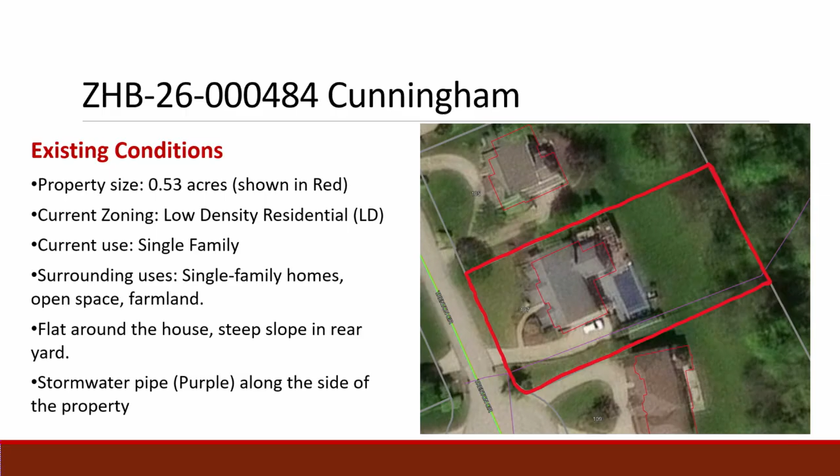The lot itself is relatively flat just around the house, but as you get to the boundary of the pool and the existing patio and deck spaces, it slopes off quite significantly toward the rear yard. I'll get to a picture here later.

The proposed improvement requiring the variance is a proposed pool house. As seen from the rear of the yard, it would be 2 stories; as seen from the house, it would be only 1 story in height. The pool house has a total square footprint of 676 square feet.

This variance is for additional lot coverage only. The maximum lot coverage in this zoning district is 15%. They're asking for an additional 1.3% lot coverage to enable them to construct this pool house.

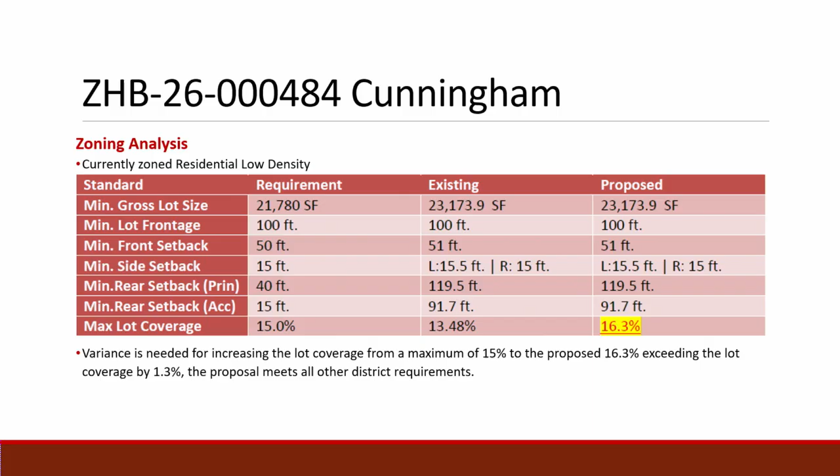The main hardship here is the slope of the lot and the topography. The backyard itself is very steep.

The applicant is hoping that with this additional structure on their lot, it gives them some more usable space in their rear yard, connecting to the other features in their yard.

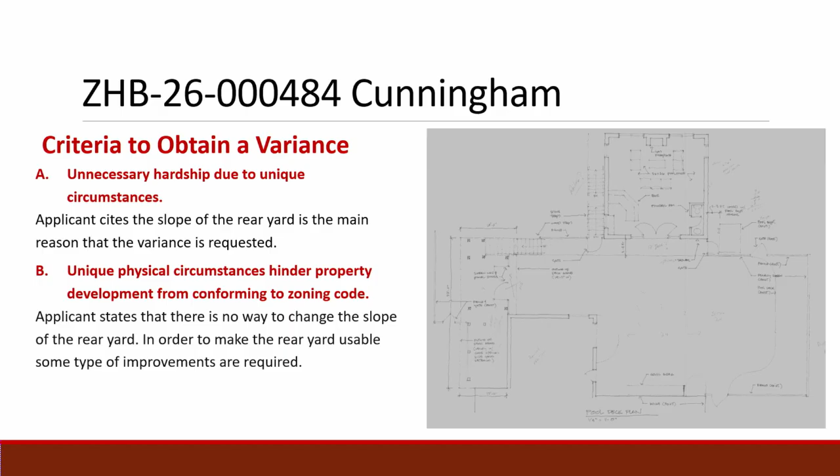The pool house itself is relatively common for Peters Township. We have a lot of accessory structures, including pool houses, when people install pools in their rear yard.

They do not propose any additional grading that will require the construction of retaining walls or grading within the setbacks next to adjacent lots.

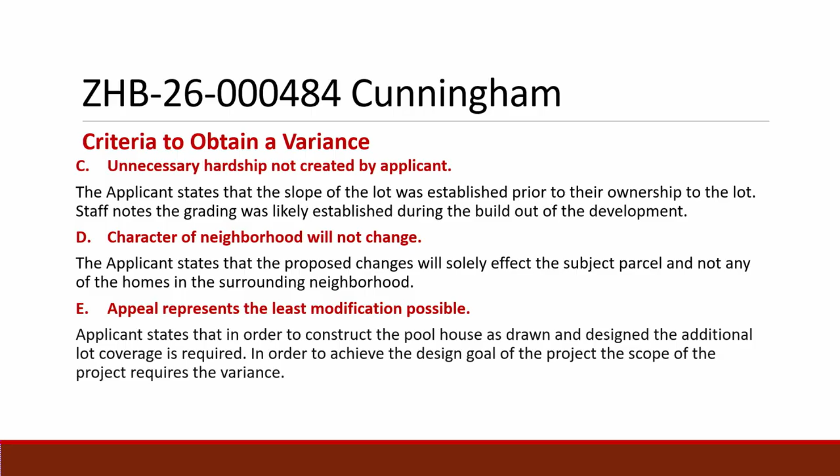Our conditions, if you were to grant this variance, are fairly standard. They have to apply for a building permit and they'll have 1 year to start. They would also have to come in for an additional variance if they ever want additional lot coverage in the future. That's all I have for you.

Mr. King, the pool house is an accessory structure. That is correct. So is the accessory structure counted in the maximum lot coverage? Yes, all lot coverage in this zoning district, whether it's a principal structure or accessory structure, is all bundled under that 15% maximum limit.

Okay. Thank you. Thank you, Mr. Chairman.

I guess, what is the square footage of the pool house that they're requesting? The footprint in total is 676 square feet. The additional 1.3% is roughly 300 square feet.

Did they work with you at all to try to reduce the size? So I met with their contractor. They also dropped off some drawings, and we talked about this a little bit to get to these numbers. I believe originally they were proposing something bigger while we were communicating over the phone, but the drawings included in your packet and on the screen are the ones submitted for this variance.

Any other questions for Mr. King?

I'm going to lay out some math for you, and you tell me if you think this seems accurate. They're proposing a 676 square foot pool house. As it currently stands, they're at 13.48% lot coverage, which is 1.52% short of the max.

And ordinarily, the planning department would treat something as de minimis if it was 0.5% or less. So if we take the amount that they're short of 15%, that's 1.52%, plus a de minimis amount of another 0.5%, we wouldn't be here if they were at that or below.

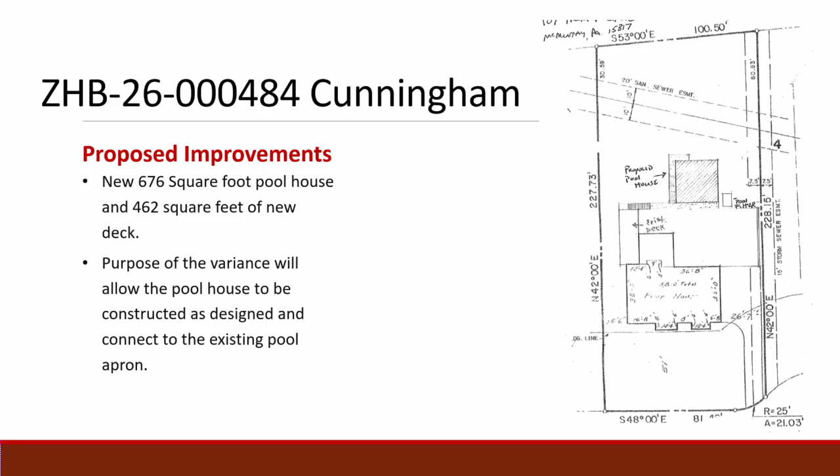Did you follow that conversation about the size of the pool building? Mm-hmm. Could you talk to us about the size you're proposing, and if you reduce the size, you wouldn't need a variance? I talked to that with my contractor, and he said he thought the size to include everything we wanted in there would need to be that size, is how he brought it up to me.

And he said the only way I could do it is to file the variance, because due to the previous owner, he put an addition on the back of the house, which takes up the already existing coverage, and he also already put the pool in, so the pool also counts toward that. So when he went through all the calculations with the architect who did that, he said this would be the most substantial to get everything you want in there, so that's how he said it.

So he came up with the size of the building? Yes. Well, we both did. Okay, yeah, we both did. And he showed me the lesser version, to show how we would just have to cut some things out of it, and what we were doing based on the amount of money that went into it.

So normally in these cases, there's a hardship reason why. Currently, when we bought the house, the whole backyard is a graded slope. There's a very small corner of the yard that's flattened, but nothing really in the backyard is totally usable space. So with this pool house going in, we thought maybe some dirt could grade it, lessen it at the bottom, flatten it somehow, or just give us some sort of usable yard space compared to what we have right now. That back corner is a little softer now.

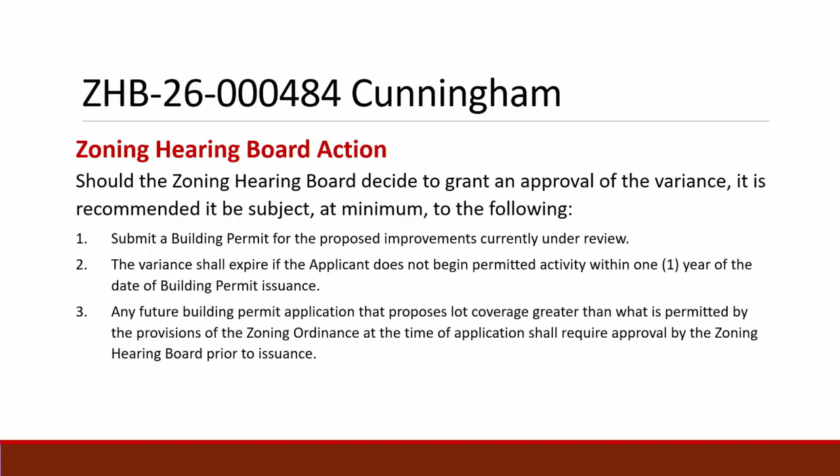Can I have a second? I'll second it. Can I have a roll call vote? Mr. Stevens? No. Ms. Pachalski? No. Mr. Higgins? No. Mr. Jones? Yes. Mr. Griffith? I vote no, but it already would have been denied anyway.

So that motion is denied. The motion to approve, you are correct, has not passed. If it's the intent of those who voted in the negative to deny this variance, somebody should make a motion, a second, and vote to deny it.

I'll make that motion. I'll second it. Can we have a roll call? Mr. Stevens? Yes. Ms. Pachalski? Yes. Mr. Higgins? Yes. Mr. Jones? No. Mr. Griffith? I vote to deny, so that would mean the motion to deny is approved.

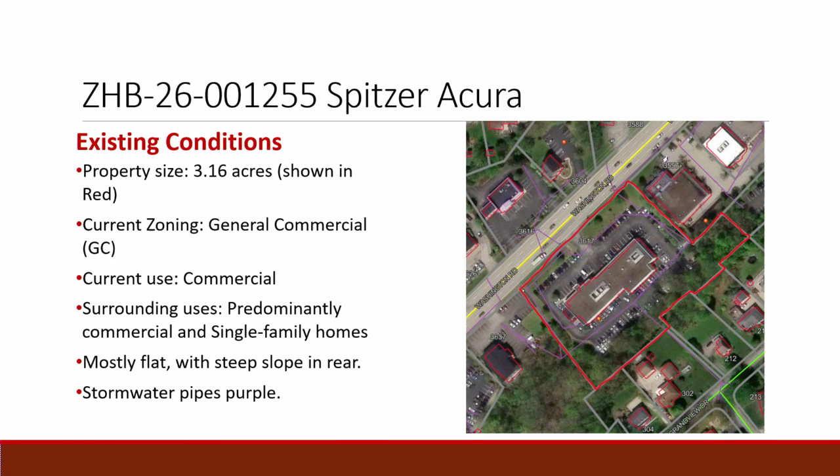Mr. King, would you provide us background and analysis on the case? Yes, so this is a commercial property, currently the Acura dealership along Washington Road. It is roughly 3.16 acres in size. It's zoned general commercial, which is our primary commercial zoning district. The surrounding uses along Washington Road are all commercial uses. To the rear of the lot, it abuts a residential neighborhood, so there are adjacent single-family homes for this property. The lot itself is mostly flat. Towards the very rear of the yard, there is a relatively steep slope before you reach the residential lots behind it.

The request is to reduce the required rear yard, the required 25-foot buffer. This buffer is required between any commercial development and adjacent residential properties. With the proposal they have, the amount they wish to encroach into that buffer varies based on their drawings and their application to us.

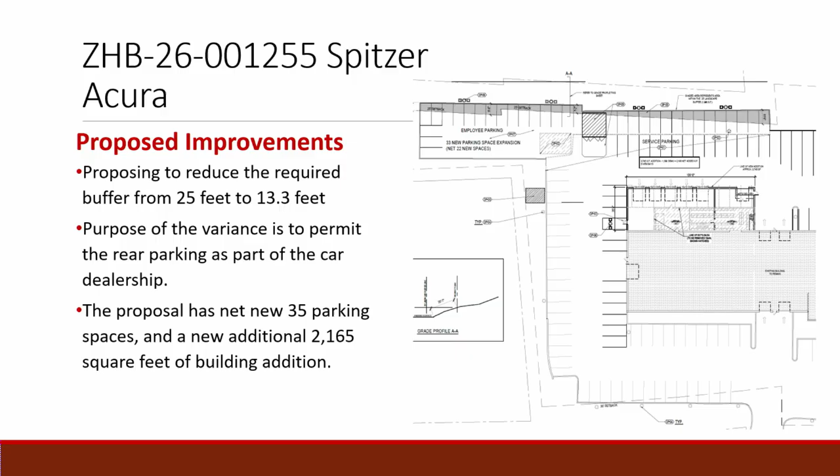The smallest that buffer would become is 13.3 feet. They're requesting this reduction so they can expand their parking area. Along with this, they're proposing an addition to reconfigure and expand the building, but that does not change the buffer.

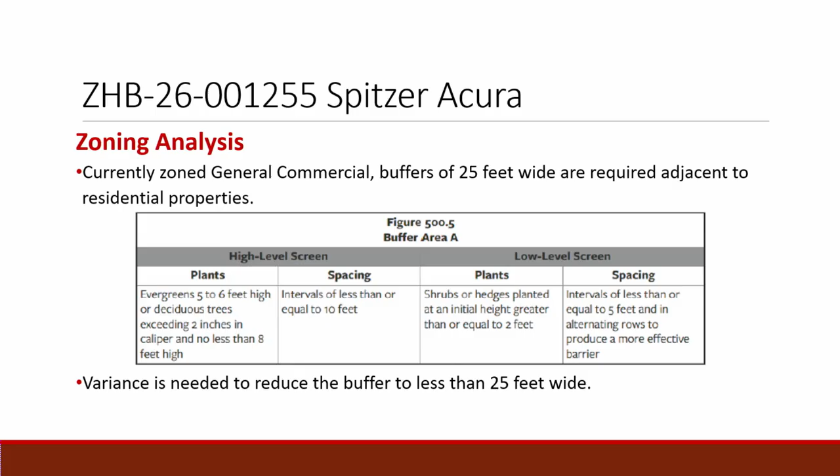We're really just looking at the proposed parking and how that encroaches on the buffer area. This buffer is required to be 25 feet between commercial development and adjacent residential property, and that's the only variance they are seeking. The applicant is proposing landscaping still in that buffer area, even though it will be smaller, and there is a slope that they plan on retaining along with existing vegetation. The applicant is mostly citing that this encroachment is very minimal and is required to expand their parking area for their growing business.

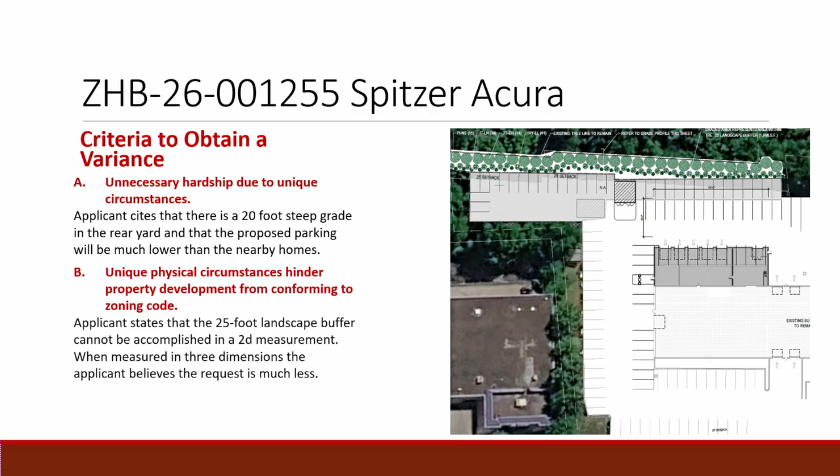I have received, as staff, quite a few neighbor communications from the adjacent residential properties. This plan originally came in as a land development, and neighbors were notified when it went to Planning Commission. At Planning Commission, it was tabled so the applicant could come to this board for this variance. We had neighbors show up there, and some of those same neighbors submitted comments.

I also believe there are a number of neighbors in the room tonight who wish to speak on this. Most of the neighbor communications cite the reduction of the buffer and their proximity to the commercial district as their main concern. If the board were to grant this variance, fairly standard conditions would apply, though they would have to submit any updated drawings to go back in front of Planning Commission whenever it's rescheduled. That's all I have for you tonight on this one.

I have questions. So buffers have been the buzzword in the township for the last couple of months. Is this a landscaping buffer or a parking buffer? What type of buffer is it? This is a landscape buffer. Anytime there's commercial development adjacent to a residentially zoned property, there's required to be this buffer area, which is 25 feet in width and has the plantings shown in the detail provided.

Okay, right in the middle, is that a dumpster area or is that a building? I believe that is a dumpster area. See, Mr. King, you brought up a good point. Prior to the site plan, does this property conform to the parking ordinance? The current parking for that site meets our minimum parking requirements. Perfect.

But again, that's parking for vehicles that are intended or hoped to be sold, not customer parking. My understanding is our minimum parking requirements are based off of estimated trips to and from that property, so ideally customer parking. For example, a high turnover fast food restaurant may require a lot of parking compared to a sit-down restaurant, or vice versa.

Well, maybe I'm misspeaking, but isn't this site plan for vehicle sales? My understanding is most of the proposed new parking is for storage of vehicles that would be sold as part of the dealership's business. And around the area where the showroom is located, that's where you're required to have customer parking, handicap parking, things of that nature. Correct.

So, and I know the applicant would address this if the administration has some questions. But the area that's shaded and the area requesting for the variance, that's to provide vehicles to be situated there in the event of a sale or to show customers. That is my understanding, but the applicant could speak better to that.

In fact, the landscape buffer - all of those trees - I think they all lose their leaves in the winter. But for the landscape buffer we're putting up, we're putting in all evergreens. So that's an improvement on a buffer. We're trying to accommodate as best we can.

Tim's going to talk a little bit about the topographical barriers that we have, the irregular lot shape that we have. We really feel like this buffering and screening with the landscape area, even though we're asking for a variance, is still a very significant buffer of landscaped area. That's quite an investment we're making in that, and I think it will be very helpful in not creating any adverse impact on the neighborhood.

We also believe that we could have tried to expand down to the southern part of our rear property, but there's a ditch back there. We would have to take out almost all the trees on that hillside to culvert it and flatten it because it dips off. So that's what made us go to the north end of the property, because we wouldn't have to take down nearly as much foliage on that hillside, and the variance we would ask for would be significantly less than if we went to the south side.

Lastly, I'll say this before I turn it over to Tim and Dan: the circulation around that area - parts deliveries, car deliveries, all that - really bottlenecks up there, and there's gridlock, and it can be a little hazardous. So we were just trying to give ourselves a little breathing room to alleviate some of those hazards. With that, I'm going to let Tim speak a little bit about the topography and the lot itself.

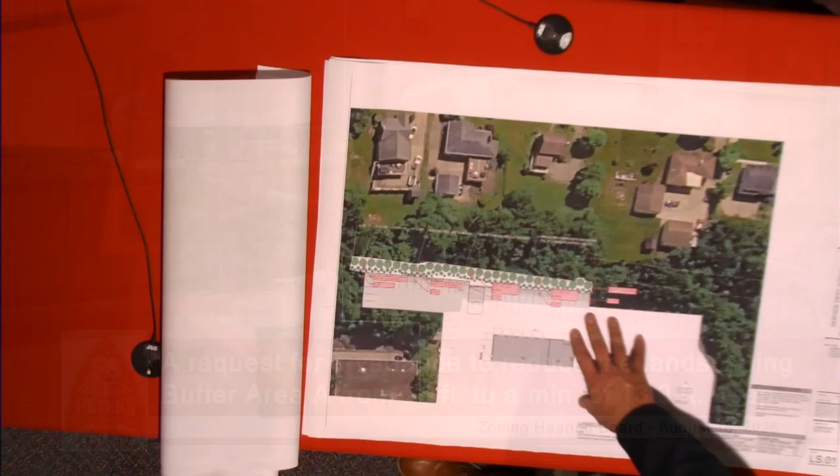This drawing here, I spent some time this week to document the variance dimension and how it changes as the slope follows the property line. So towards the right side of the area we're looking for relief from, it goes from 11'8", and then as you move forward to the left, it goes to 7'2". Over by the dumpster enclosure, it goes down to 2 feet 2 inches, and then it jogs back a little because of the way our property line is, and then it's 9'5", and then it goes down to 6'8" at the end.

Some of the changes we made from Planning Commission last month were being respectful of the landscape buffer. We moved the dumpster enclosure, which was previously encroaching on the buffer. We had light poles that were in the landscape buffer, and I moved those out, so those are now going to be along the commercial side, and also at this corner here, so we're going to illuminate the lot that way.

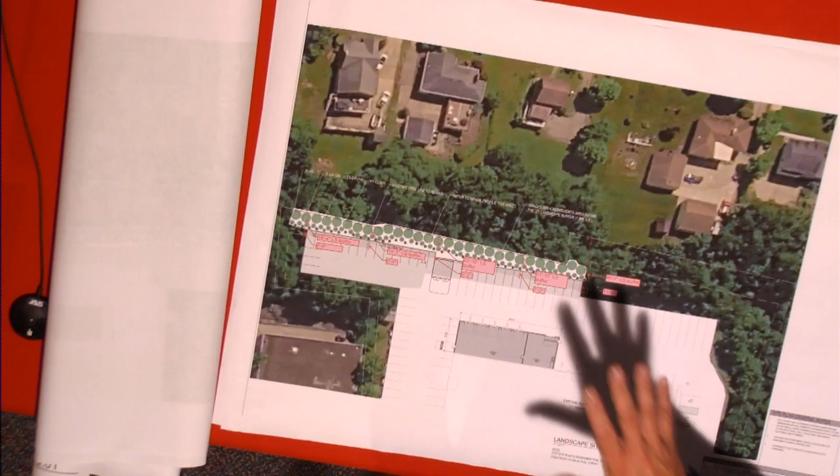I also want to mention that the buffer itself, the plantings that are in the zoning ordinance, we're following that. These are premium plantings we're putting in here. They're eastern hemlock, which we have specified, and Norway spruces, along with some of the lower plantings. So it's multi-tiered, which I have a rendering for that was in the packet.

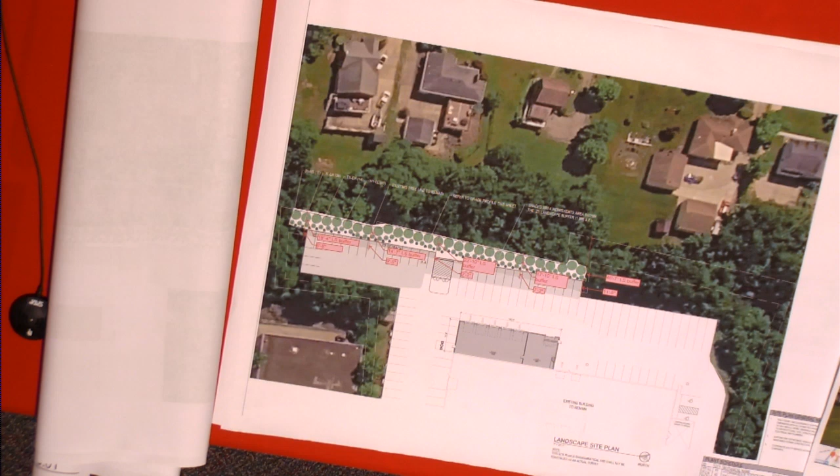I also did another study from the Grandview side, and it just so happens that when I was using Google Earth to virtually drive, it was fall time, and you can really see that it's all deciduous trees there, so you can see straight through to the Spitzer building from Grandview. A little difficult to see with this image, but the white line here is what I'm projecting as our pavement line when we expand.

So it's not visible from the street. And then, one year of tree growth, projecting it to come up to the bottom of the hill slope from the residence side. By the time we get to 10 years, I'm projecting these trees are going to be taller than the building itself.

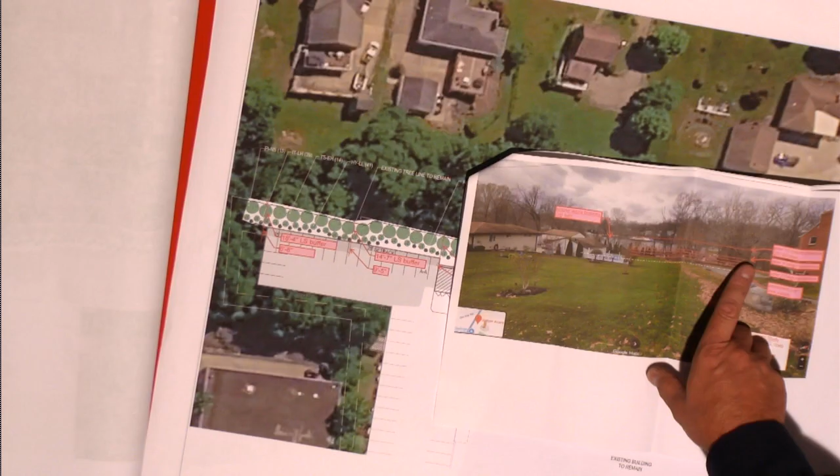It's my opinion that if we give it time with these plantings, they will be super tall. These trees grow from 40 to 60 feet in height. When mature, they grow at a rate of 2 to 3 feet per year. So it's only going to take a matter of a few years before these things really start popping out of the ground.

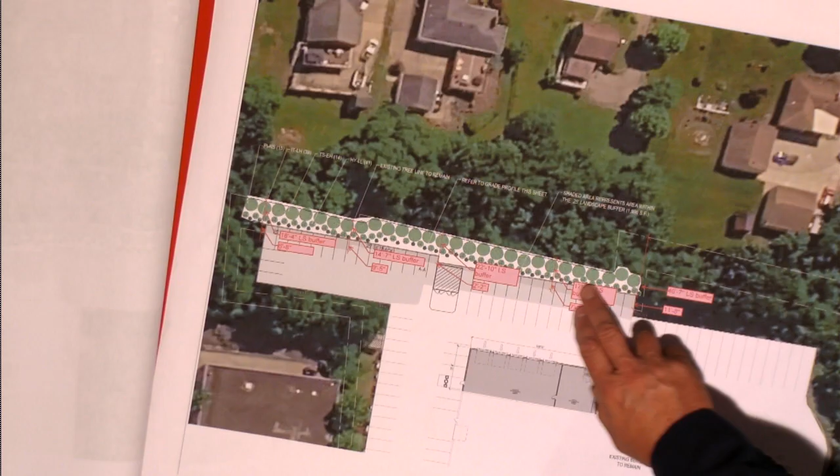One other thing to add, I visited the site again today just to walk it from Spitzer's property side. This area we're showing here, right along here, this is the existing pavement line in white. I stood here. There really are no trees there currently, it's overgrowth, and that's the area we're looking to develop.

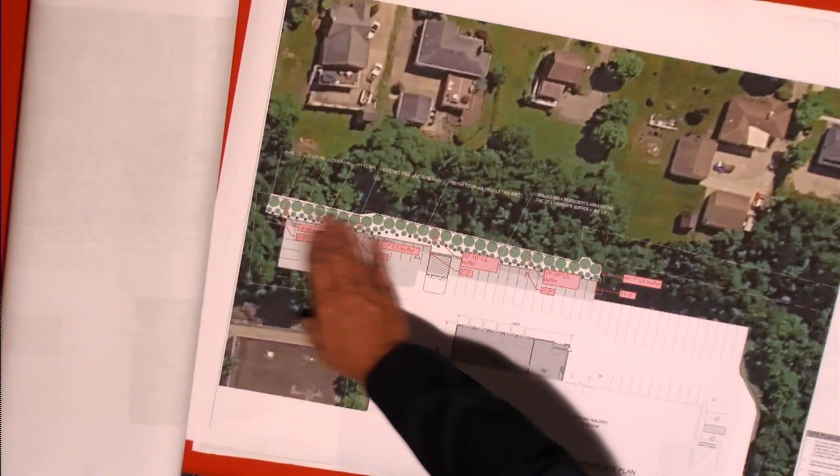Furthering that, with this landscape buffer, if we don't have to tear down what's there just to put in this buffer, we can supplement what's there. There are some decent sized oak and maple trees back here within our property. We could keep those, work around them, and add the evergreens in between, so you get a nice variety in between the trees that are currently there.

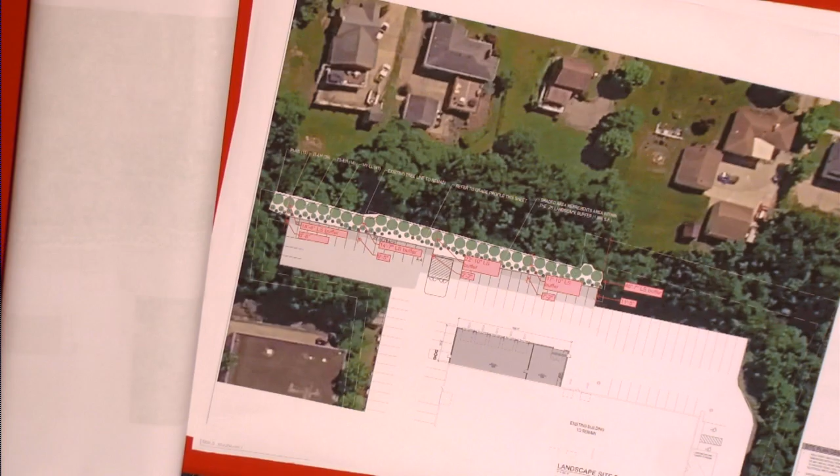So that rendering is 2036? Ten years from now, yes, 2036. So if you were to plant, what's the height of the evergreen if you planted today? Today, I don't think you're really going to see that much, because we're proposing 6-foot tall trees.

I estimated that the elevation height would be at 1049, grade height. Our parking lot level is at 1046. The trees would be planted approximately 3 feet higher than that, based on how the topography rolls up. So the tree would be 6 foot tall at planting today? Day one.

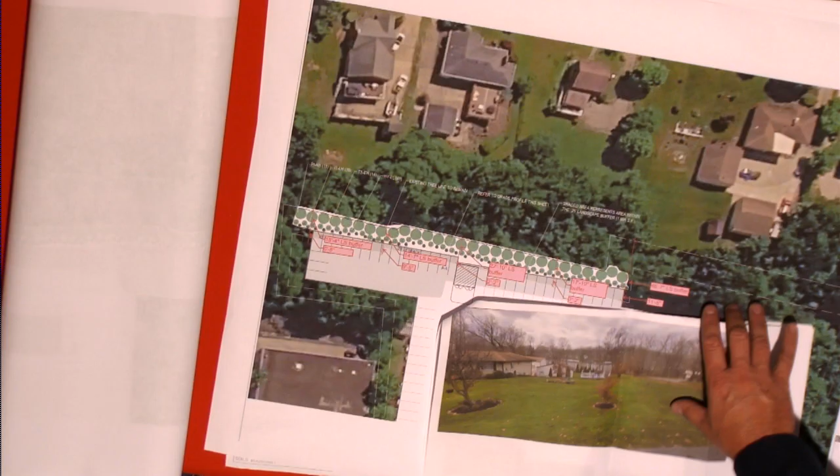Has there been any discussion with the planning commission about long-term maintenance? We know we've been having some harsh winters. If any of these trees, since they're not mature, were to have an issue, would the applicant be open to a condition that you'd enter into some type of long-term maintenance plan, replacing them if they were to die? Of course.

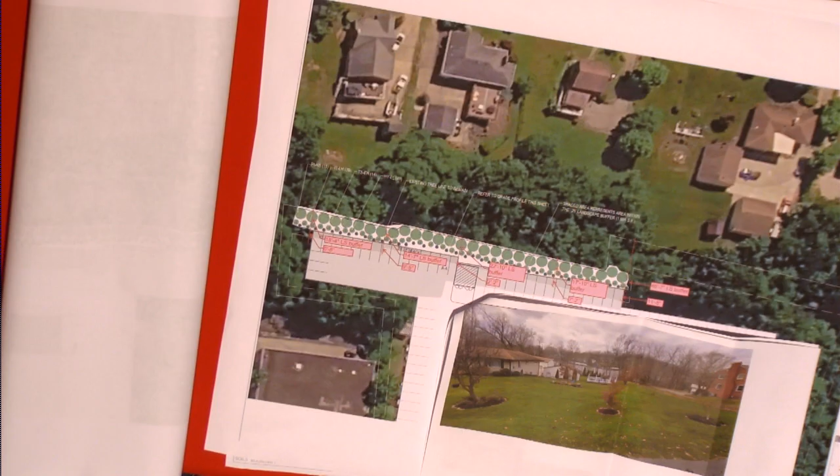The obligation of the applicant is to have an evergreen that's 5 to 6 feet high. Whether it grows 10 feet, 25 feet, or 50 feet, they just have to make sure the evergreen planted is at least 6 feet high. In our ordinance, all of our planting buffers have minimum planting requirements: caliper, height, species, number of plantings within a certain area, and a requirement to replace those trees within a certain number of years. But we do not have a requirement that they grow to a certain size in a certain amount of years.

But if it's dead, we'll replace it. The height has to be 6 feet at the time of planting. They can't plant saplings and just hope they grow. That is correct.

I have a question, again only for edification of the board. I think it's Exhibit G that you referred to as a rendering. That's it, yes. So that doesn't exist currently, that's an after picture, or rendering - hopefully, that's up to you guys.

That depicts 2 lines of vehicles. Correct, the front line exists now, and then we're going to double stack. Okay, double stack.

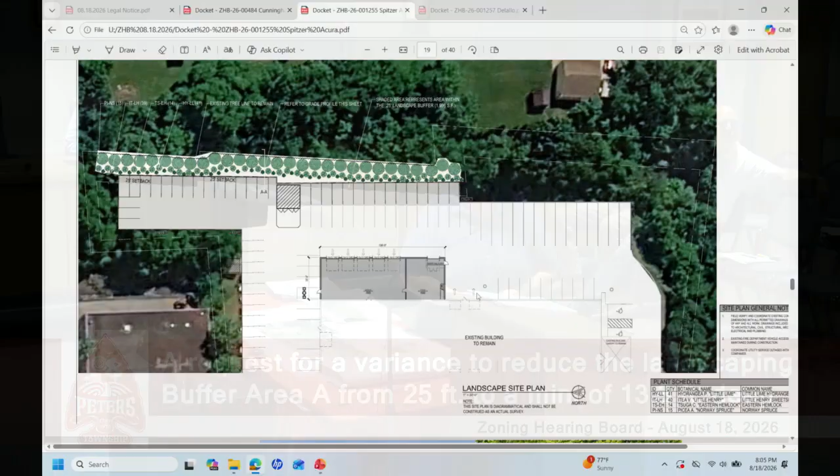Over here would likely be employee parking. Now, that area that's employee parking, do you also intend that it'll be double stacked? No, as drawn, singles here.

If you could go back to that rendering - the lot right now ends about right here, so this is all new, pushing back into that finger of our property back here. This is the area we're talking about that would be for employee parking, single row employee parking back in the corner.

And did I understand correctly that the reason you designed that back lot that way is for access purposes, to be able to get back in and out, so that's why you didn't double stack them? Exactly.

That area which you described on the rendering, Exhibit G, where the proposed employee parking is - the variance you would be requesting goes from 9.5 feet to 6.8 feet, is that right? At the far north portion, it would be a 6'8" buffer reduction.

Am I correct then that the only area in which you are requesting the maximum variance of 11.7 feet would be to the far right, and it looks like it takes up maybe 2 parking spaces of a double-stacked parking space? That's correct. And then it tapers down, reducing under your testimony to 7.2 feet, and then down to 2 feet, 2 inches. Correct.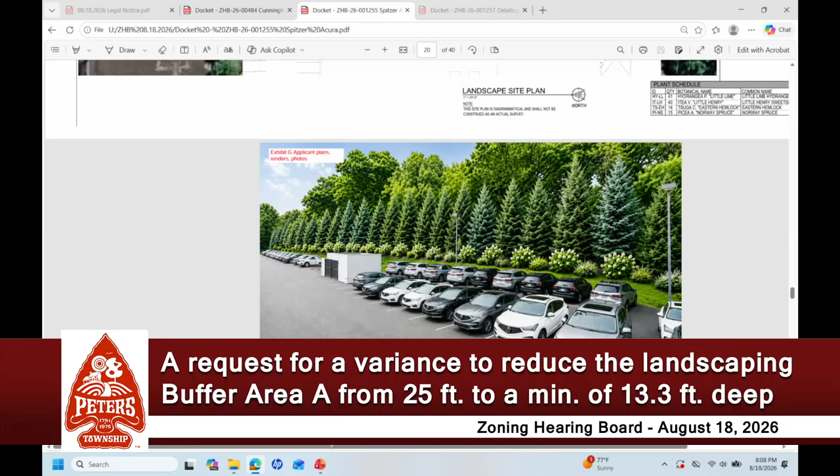Mr. Clark, did you submit any letter? I did, and I've got copies here if that would be useful. I have additional copies I could give. Has that letter been a part of the packet here, Mr. King? I believe so. I only received written communications prior to Friday, and all of those communications were included in the packet sent to all the board members. I think I sent mine in Tuesday or Wednesday, so it should be in there.

Can you state your name again and address so I can find it? George Clark, 212 Grandview. It begins, it looks like, on the PDF—last 3 pages on Exhibit H, PDF page 35. Thank you. All right, go ahead.

Yes, I'd like to request party status. Do I need to do that? Do I need to just assert that? That's fine, you place that on the record.

Okay. I went, and I'm looking, since this gentleman has mentioned it, anybody who wishes to speak—party status gives you the right to information concerning the hearing before the board. There are certain requests and letters that I have looked at that indicate party status, and the request is for any transcripts, exhibits, notices, decisions, and things like that. The township has the right to charge for those type of things. This young lady sitting to my right charges for her work, and if she charges, the township has the right to pass that off. Merely requesting party status doesn't mean that you get all of that automatically and, most importantly, for free. I want to indicate that.

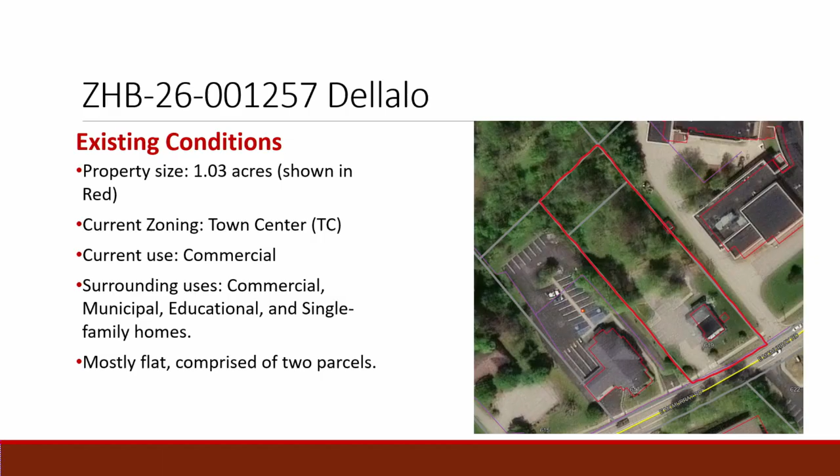This property, just across the road and up the street a little bit from where we are today, is approximately 1 acre in size in the town center zoning district. The current use is commercial, the proposed use is commercial. Surrounding uses are commercial, municipal offices, educational with the school, and when you go out a bit further, there's some single family homes. The lot itself is mostly flat. It's currently comprised of 2 parcels. Those will be consolidated with the land development plan.

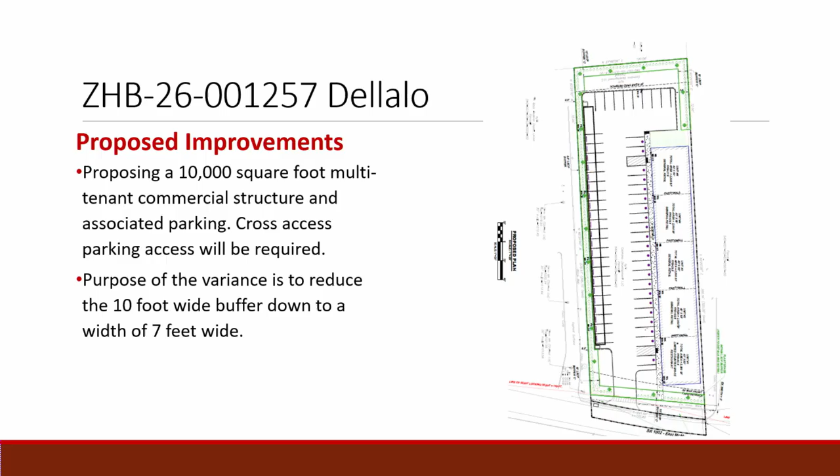The proposed improvement is a roughly 10,000 square foot multi-tenant commercial structure with the required parking. The buffer that we are having you consider tonight is here adjacent to the bank just across the street. There is a required 10-foot wide buffer required around all of the parking. Just the buffer here on this left side along this row of parking stalls is the request from 10 feet to 7 feet in width.

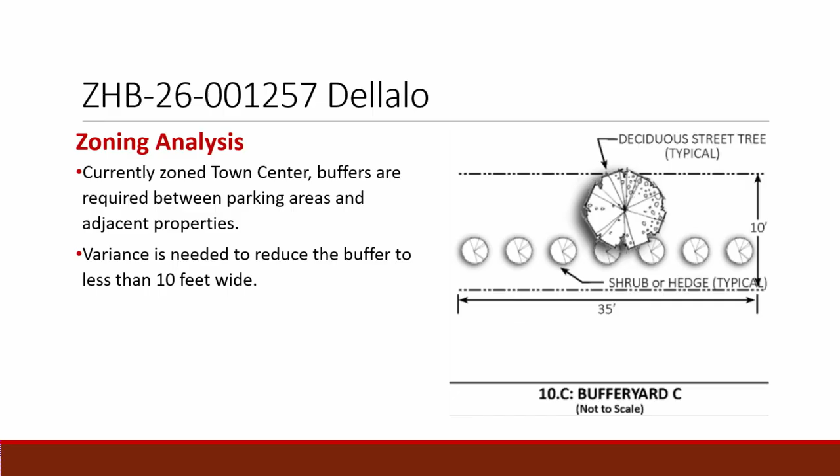This buffer is required for all parking areas adjacent to the property line in the zoning district, and the request is for a reduction.

The applicant mainly cites the packaging of the lot as the main hardship. It's very narrow, and they're trying to fit this building in. They're required to have certain stall lengths, certain sidewalk widths in front of the building, and certain aisle widths between parking spots. They're also required to have a rear cross access easement. If there's ever future development on adjacent lots, the township has a policy that there will be future rear yard or through lot connections.

The applicant, I will note, has made several attempts to revise the layout of this lot and their parking with staff prior to Planning Commission and since Planning Commission. One of those revisions enabled them to reduce the amount of relief requested.

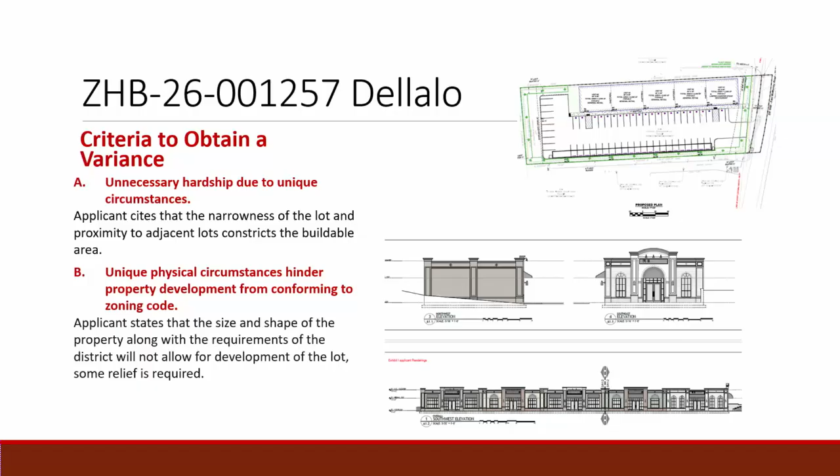If the board decides to approve this variance, we would recommend conditions that require the applicant to update and revise their plans prior to returning to Planning Commission, as well as our standard conditions for 1 year post-approval for the activity to begin. Any future changes to the buffer would need another variance. That's all I have for you.

Mr. King: so the ordinance requires a 10-foot buffer area, is that correct? Correct. And the applicant is looking to reduce it, asking for a 3-foot variance, is that correct? Correct. So that the buffer, instead of being 10 feet, would be 7 feet. That is correct. Thank you.

And that's for additional parking? That is for the minimum required parking based off of the size of the building. I do not believe there is additional excess parking proposed with this development. And that is based on the size of the building that they're... That is correct, yes. So if they reduce the size of the building, that would reduce the parking? Yes, the reduction in the size of the building would reduce the overall number of parking required for the site.

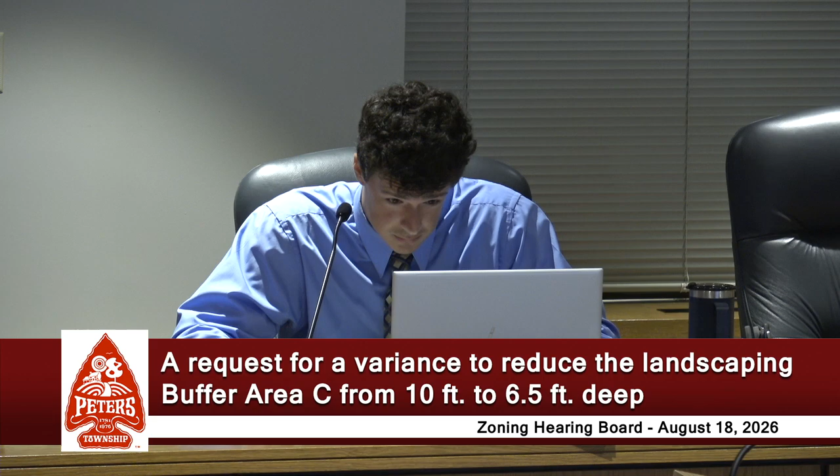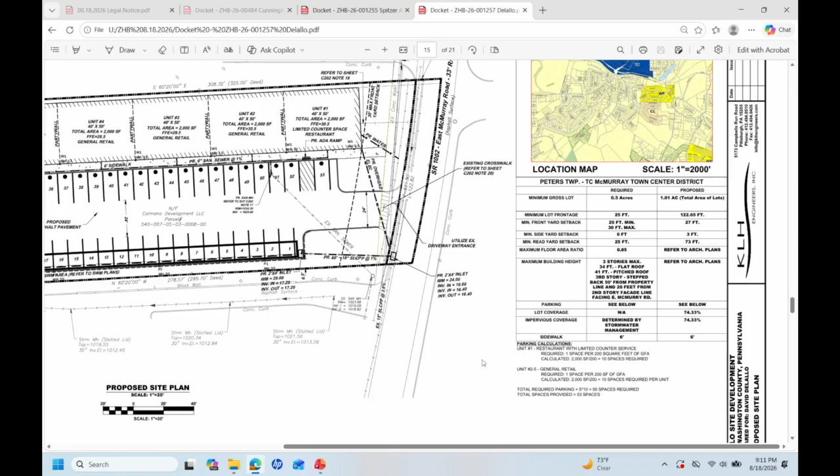So what is the required number of parking spaces for that size building? I do not know that calculation off the top of my head. It's under the zoning chart here. There you go. Okay. It's on the right hand side of the plan. Looks like 50 spaces were required for that calculation. I think it's 53.

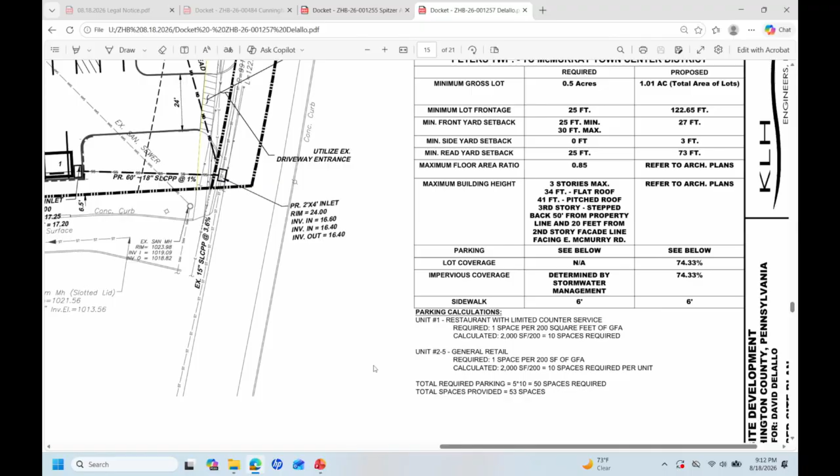Any other questions for Mr. King? Sorry, the landscape buffer crosses the driveway, or should that be just trimmed out? Yeah, there. So the landscaping buffer is also required between the road and the front of the building, or parking spaces. I believe they just continued that line for ease of drawing, but there you can see where the trees stop right before the edge and trees resume.

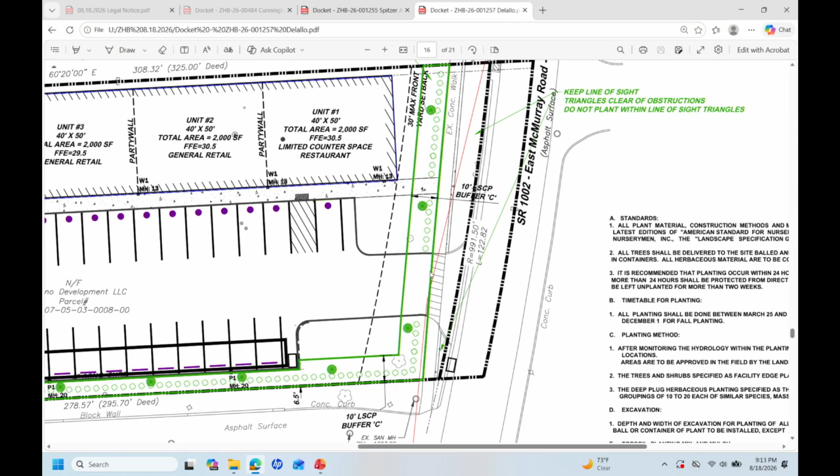The board is a quasi-judicial body. As such, we ask that anyone providing testimony in this case be sworn in. Whoever is here tonight wishing to testify in this case, please stand and be sworn in at this time. Do you swear or affirm that the testimony you give today will be the truth, the whole truth, nothing but the truth? I do.

Thank you. Anyone who wishes to testify, come up and sign in, state your name and address. David Delallo, and I live at 101 Red Oak Drive, McMurray 15317. Mike Rizzo, I'm the engineer for the applicant on behalf of KLH Engineers. Our office is 5313 Campbell's Run Road, Pittsburgh.

All right, well, floor. I guess state your case. Okay, what's your hardship? The reason why we need the hardship is we're trying to create a desirable tenant space, and to shrink the building, it's just getting too small.

So we reconfigured the parking lot so the parking would work with the building size. And we spoke to the fire department, and they said that they would rather see what we're proposing, that parking lot be for the ease of access for fire trucks and emergency vehicles. So that's why we went back to that parking lot setup.

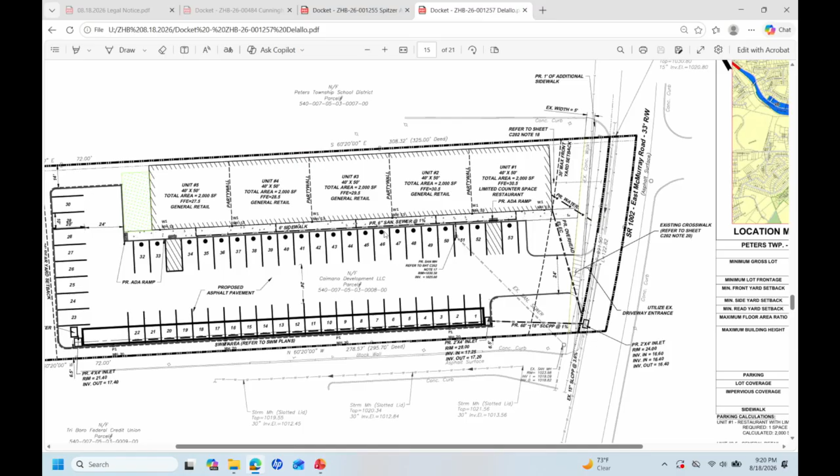No other variances for this site other than the buffer? Knock on wood, as far as I'm aware, no. That's impressive.

Any other questions for Mr. Delallo? You have a question? No. You wanted to testify? I want to testify, yes. You two can sit down. Thank you.

We're here to object to approval of the variance. We attended the zoning planning meeting, and my understanding is that it has not been approved. There's another hearing. There were 4 conditions. I was wishful that we would have been first, because this has been a long night for you guys, and I'm sure you're all spent. So I'm going to make this as quick as I can. There were 4 conditions of concern that we had regarding the property.

There's about an 8 to 10 foot grade from their property down to ours, and we had to put a retention wall there. That retention wall, obviously with freeze and thaw, water can push on it. Right now their property is 60% vegetation, and now you're trying to move this to probably 90% asphalt.

You can imagine how much water that's going to create. I know when we built our building in 2006, we had to put extensive stormwater management systems in. I'm not exactly sure we're addressing that with the Planning Commission on that.

At that last hearing, they said excess water is going to run out onto East McMurray Road. After that meeting, we went and looked at that. When you enter our building off of East McMurray Road, it's going to slope into our property. So that's a concern we got to address with the zoning.

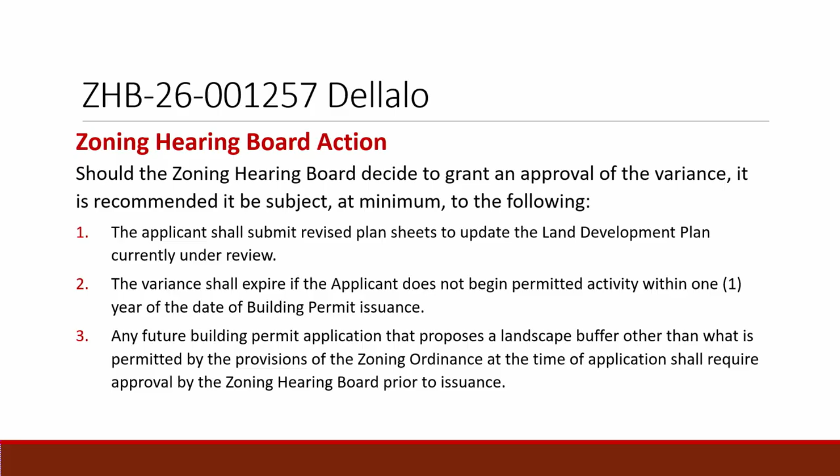I have a question—so you're not holding this subject to the 5 conditions to qualify for a variance? There's been a motion and second to approve the request for variance, and the board will take a vote on that. So I didn't second it. I just—for a roll call vote, Mr. Stevens?

I would be no. Mr. Chalsky? Yes. Mr. Higgins? Yes. Mr. Jones? Yes. Mr. Griffith? I would be no, too. So with that, the motion is approved on a vote of 3 to 2.

A written decision will follow within 45 days. If anyone is opposed, they have the right to file an appeal to the Court of Common Pleas of Washington County. That appeal, my understanding is, laws of the Commonwealth require that appeal to be filed with the Court of Common Pleas of Washington County within 30 days of the board's decision. The 30 days will begin to run from tomorrow. Within 45 days of tonight, findings of fact and conclusions of law to said decision will be issued.